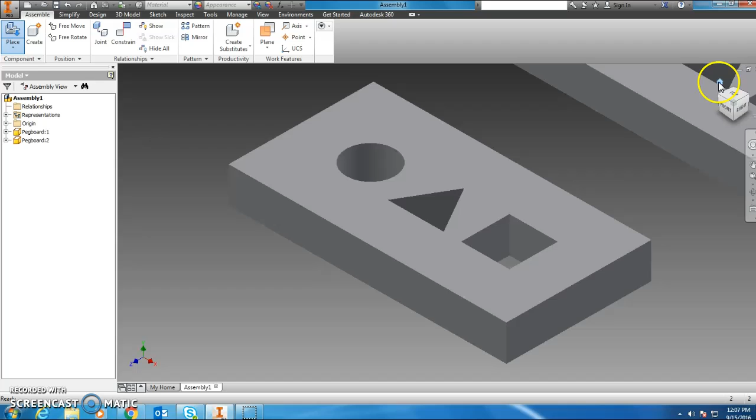Go ahead and place that in there. Okay, and there it is. The first thing we need to do to the actual pegboard is ground it. If you right-click on it and select the grounded feature, that will keep it from moving. You'll see the little push pin, and that way I know it's grounded.

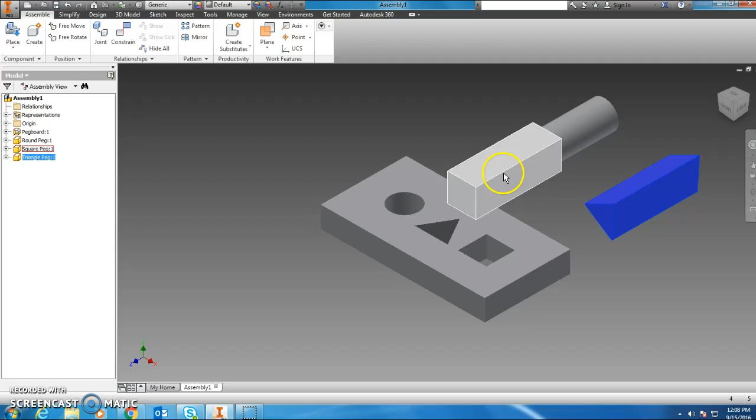The next thing I'm going to place are my 3 pegs. I have a round peg, a square peg, and a triangle peg. So let's go ahead and place those in there. Okay, and move them out a little bit so I can see all 3. Let's start with the round peg.

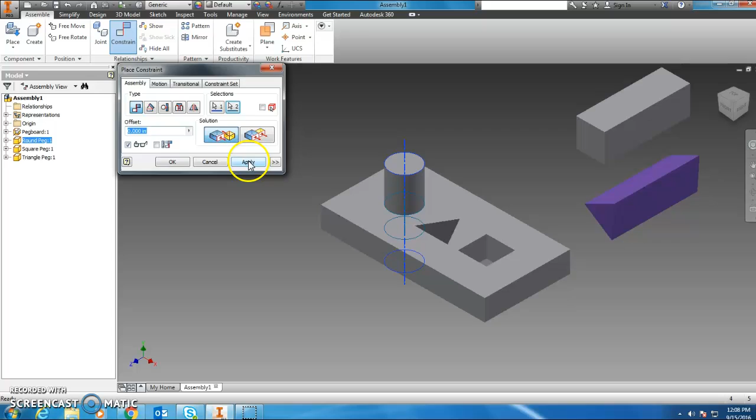I click on the constrain tool at the top of the page, and this one is going to actually be a mate, and we are mating the center of the round peg to the center of the round hole. Go ahead and click apply, and that's all you need for the round peg.

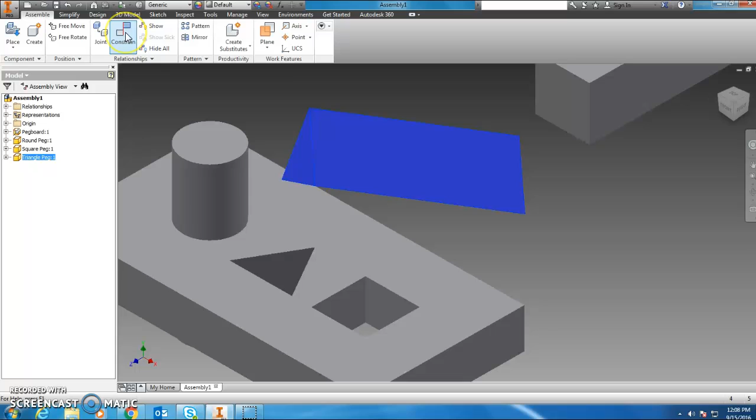The triangle peg has 3 sides, so I'm going to mate one side to one side of the triangle hole, then apply it, close that feature, and move it out of the way a little bit. Now I need to choose a different side, so I'm going to click constrain, the mate tool again. This time I'm going to go with this right side of the triangle, and I'm going to have to move the camera a little bit so I can see the right side of the triangle hole. Click apply, and your triangle is in the correct place.

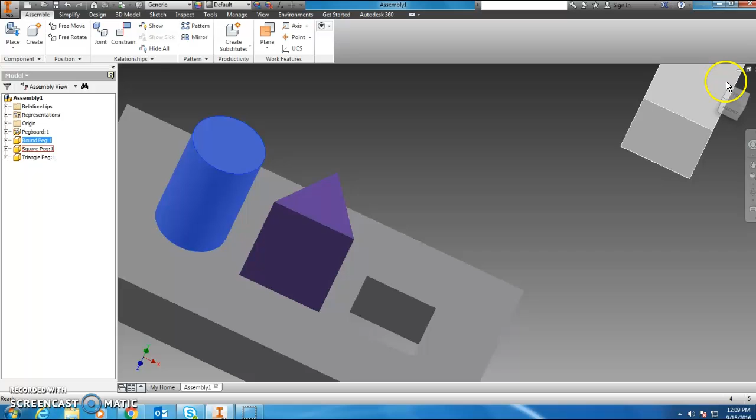I'm going to go ahead and click home view and mate the square peg into the square hole. So, constrain tool, mate, I'm going to choose the top side, and I'm going to put it down in the square hole on the left hand side here. Now this is important. You need to apply the constraint and close the dialog box and move that square peg out of the way.

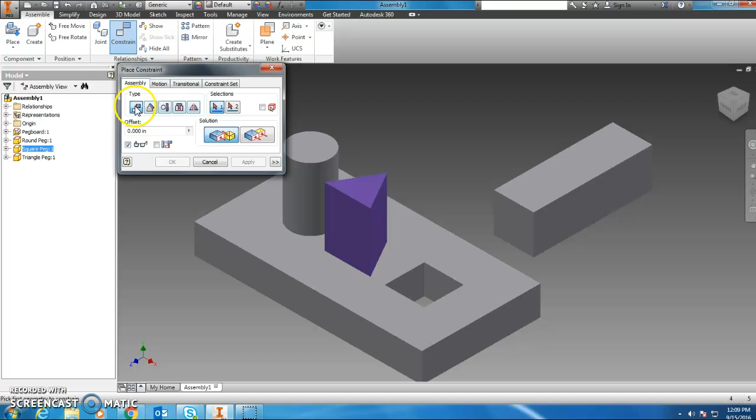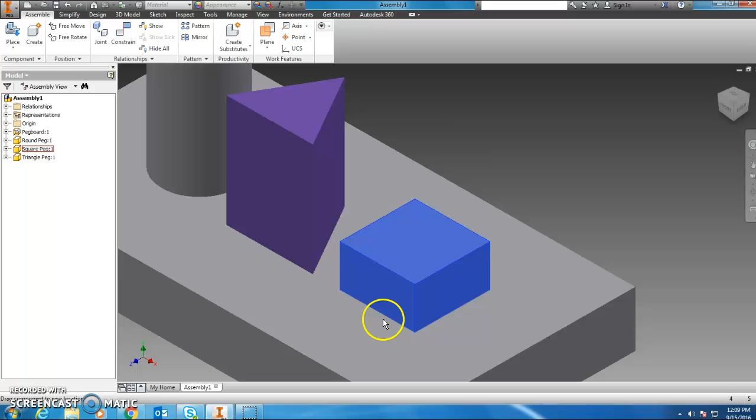Then I'm going to click on constrain, and I'm going to click on the mate tool. I'm going to constrain the top of it to this back side of the square hole. I have successfully mated 2 sides that are side by side or adjacent to one another of the square peg, and it's moving the way it's supposed to. So now I have all 3 pegs placed into the pegboard just like we want it.

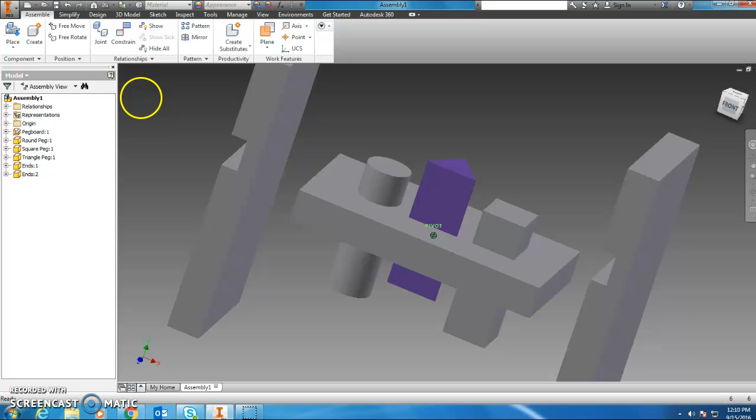Now I need to put the end pieces on, so I'm going to go place, end, open, and I'm going to have 2 of them, so I'm going to place it 2 times. Then I'm going to right click and click OK. Now let's start with this one. I'm going to change the camera angle a little bit, and what I want to do is constrain. I'm going to mate the outside of my pegboard to the inside of the end, which is down in there.

And now they're stuck together. I clicked apply. I'm going to close that, change the view a little bit, move this out there, then I'm going to click constrain again.

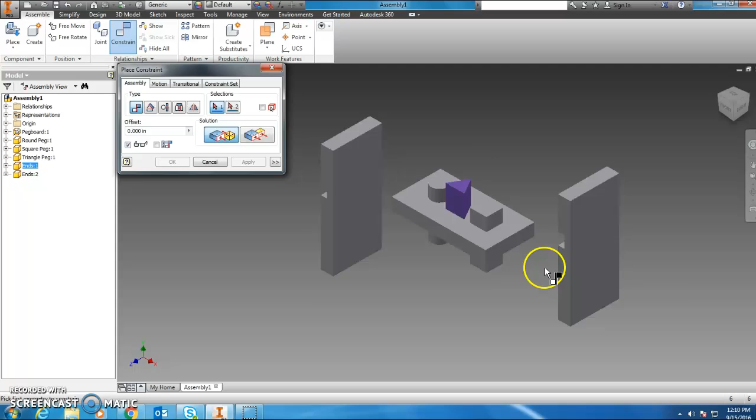What I'm going to do this time is use the inside lower lip of the end piece, and if you haven't figured it out already, we're going to mate it to the bottom piece of the pegboard. And there we go. I'm going to click apply. Now, when I close the dialog box, you notice these are constrained to each other, but they can still slide back and forth.

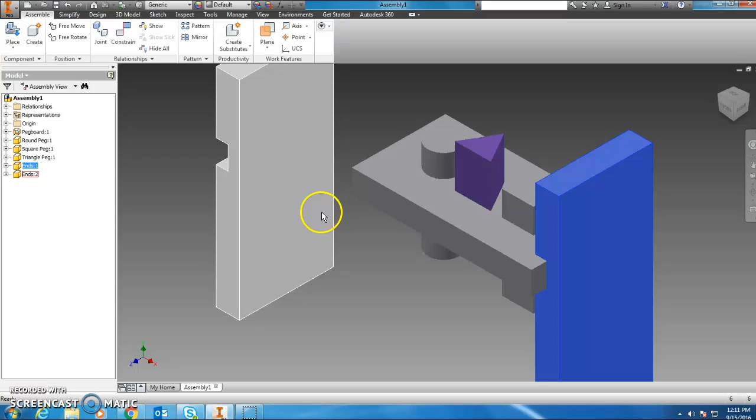So the tool that we haven't used for today's purposes is called flush. In constrain and under mate, you can select this option over here to the right that is called flush. I'm going to zoom in a little bit, and I'm going to flush the front side of the pegboard to the front side of the end piece, and it sucks them together so they're nice and smooth, and I'm going to click apply.

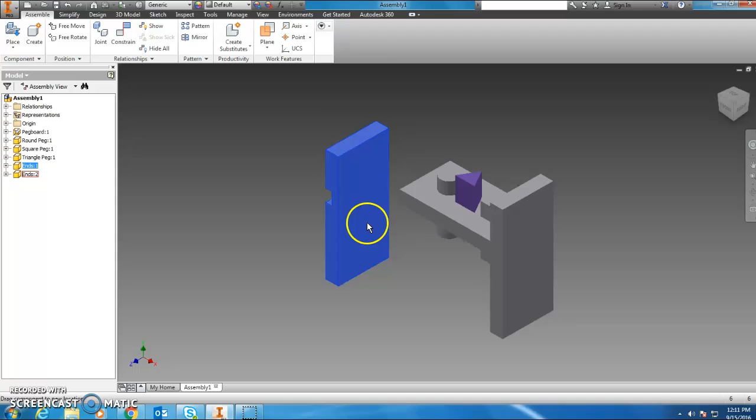So now my end piece is stuck into place. Now I need to do the same thing with this end piece. A lot of kids get nervous because this end piece is facing the wrong way. But when you flush it and mate it, it will flip it around so it lines up nicely.

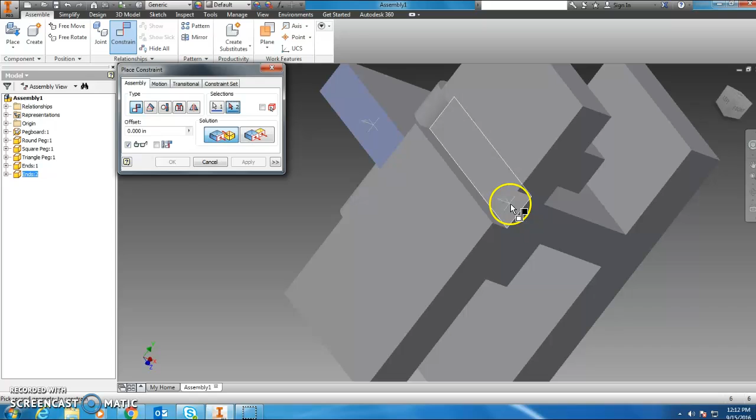So I'm going to click the Constrain tool. I'm going to move my camera so that I can see the parts that I want. And what I want is to mate the left side of the pegboard to this internal side of my other end piece. And that flips it around.

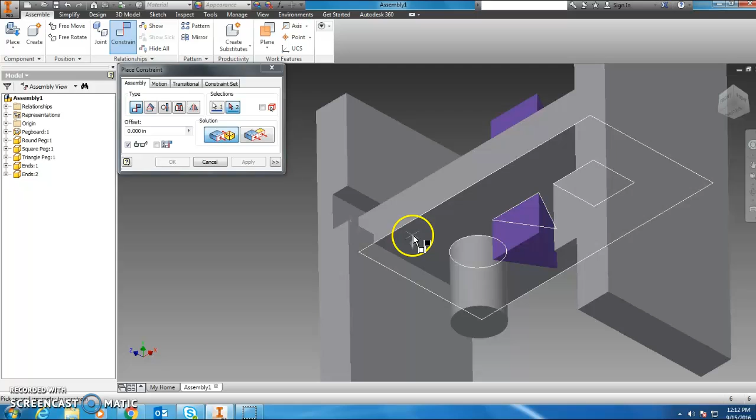I'm going to apply that, go back to my home view, and you can still see the under portion of the end piece. So I'm going to mate that to the bottom of the pegboard just like I did with the other side, and it sucks it on there.

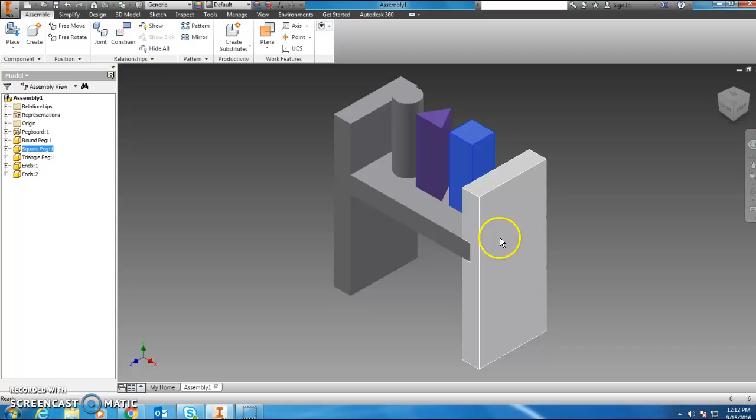Apply that, and if you remember what we did just a couple seconds ago, we will flush the front of this end piece to the front of the pegboard and apply it. So everything is working as needed. The pegs move like they're supposed to. The end pieces stay in place like they're supposed to.

So let's go ahead and place our previously created mallet head and mallet handle. I'm going to click Open, and here they both are. So this one's really easy. You can see we have our mallet head right here, and we have our handle piece.

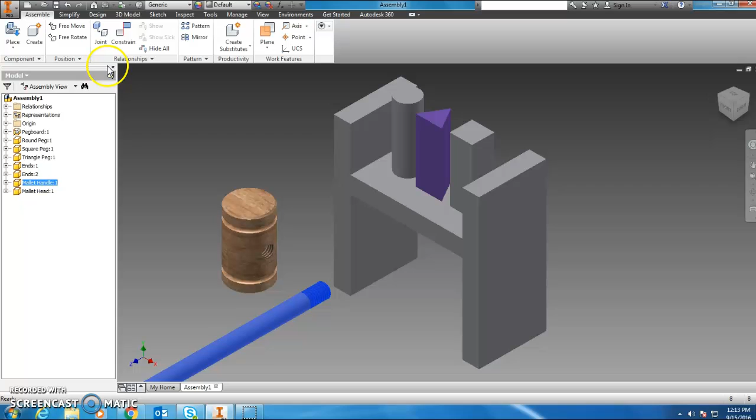We're going to use a constraining tool that we haven't used for today's purposes, and that is an insert tool. That's the 1, 2, 3, 4th one over. It says Insert, and what we're inserting is this threaded end—you see the arrows show up down there—into the mallet head, down inside of the hole that we created earlier. I'm going to click it, and it places it in there.

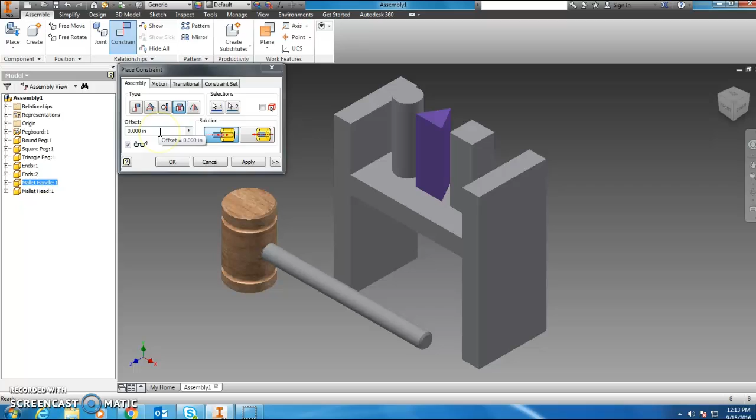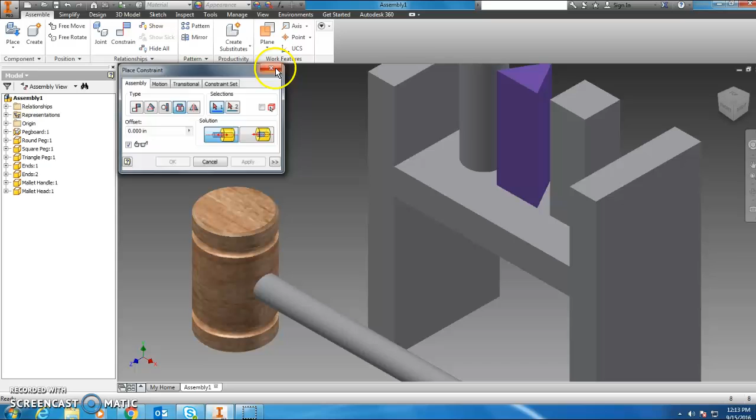Some kids like to change this offset tool to 0.25. That pushes it out a little bit so you can see the threads. Other kids don't like to see the threads at all, so you can go negative 0.25. That'll suck it all the way in there and you can't see the threads. That's just personal preference. I'm going to go ahead and apply this, close it, and everything is in there. It's all ready to go.